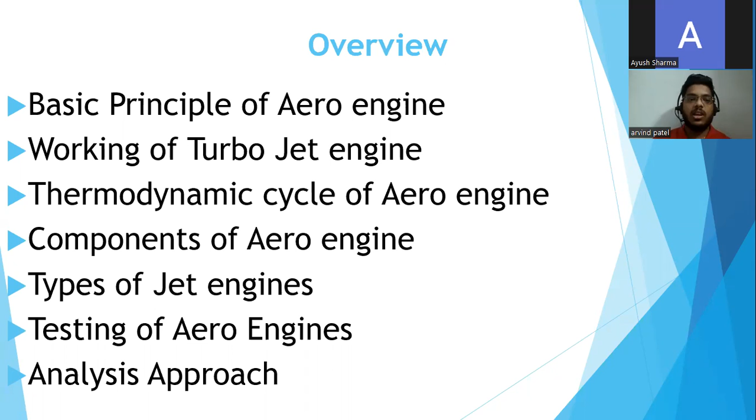Then we'll move toward the types of jet engines in the industry right now, like turbojet engines, turboprop engines, turbofan engines, and what's the difference between high bypass and low bypass jet engines. Then I'll take you through the testing of aero engines, and at last I'll give you a brief overview of how the analysis approaches work in the aero industry. So yeah, let's start.

So let's start with the basic principle of the aero engine. An aero engine basically works on Newton's third law of motion, which states that for every action there is an equal and opposite reaction. So the engine takes a large volume of air, and that air is subjected to compression in the compressor, and then it is subjected to the process of combustion, and then that air is transferred to the turbine blades, and then it will move out of the turbine blades while pushing the engine in the forward direction.

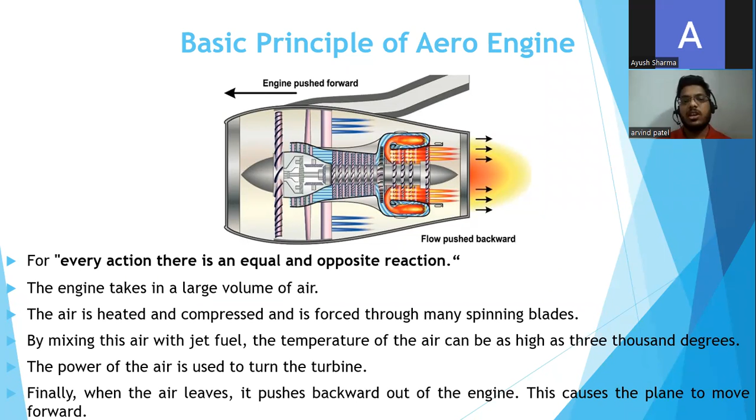So that's how your engine moves in the forward direction. And talking about the working of a turbojet engine, here you can see the different components: fan, compressor, combustor, turbine, and the nozzles, which are placed at the exhaust of the engine.

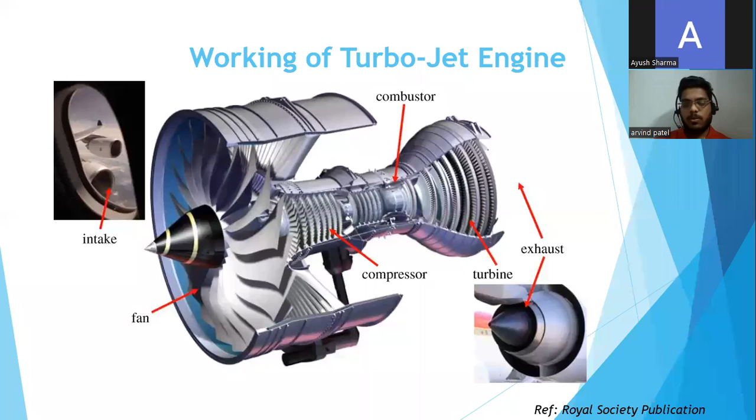So basically we can divide the engine in two sections, a cold section and a hot section. The cold section comprises processes like suction of the air at the intake, and then that air is compressed in the compressor, which increases the pressure of the air.

This high pressure air is then transferred to the combustor, which is in the hot section of the engine. The hot section basically comprises the combustor, turbine and exhaust, in which we have the process of combustion, expansion, and exhaust.

In the combustor, the high pressure air is mixed with the fuel and it's ignited. When the ignition takes place, because of the combustion, the internal energy of the air increases, which increases its velocity.

That high velocity air is then transferred to the turbine, and from the turbine it is transferred to the atmosphere through the exhaust, which applies a force on the engine in the forward direction, and that's why your engine moves forward. So that's just a brief working of a turbojet engine.

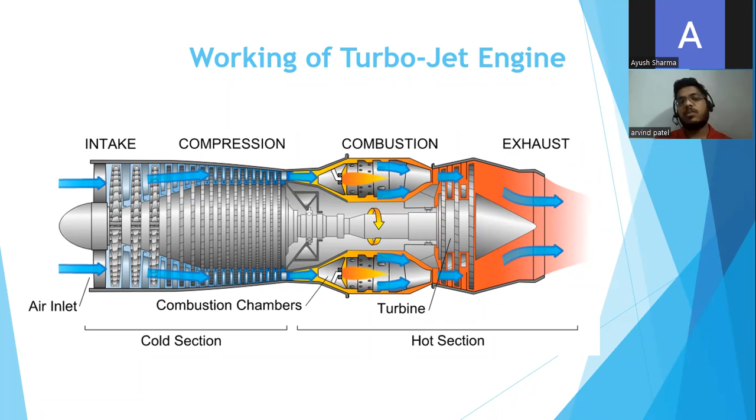Talking about the thermodynamic cycle, an aero engine basically works on the thermodynamic cycle known as the Brayton cycle. The Brayton cycle comprises 4 different processes: isentropic compression, constant pressure heat addition, isentropic expansion, and constant pressure heat rejection.

If you consider the air at point A, point A represents the atmospheric pressure here. Air is compressed in the compressor, which is an isentropic compression process. But in practice, no isentropic compression takes place because of the losses that we encounter in the compressor. So A to B represents the compression process.

Then from B to C, in the combustor, we mix the air with the fuel and ignite it. The process of combustion takes place at almost constant pressure, which is represented by B to C. And from C to D, that high velocity, high temperature air is transferred to the turbine blades, where expansion of air takes place.

This high velocity air then comes out of the engine through the exhaust, releasing the heat to the atmosphere, which is represented by the constant pressure heat rejection process. So that's basically the thermodynamic cycle of an aero engine, known as the Brayton cycle.

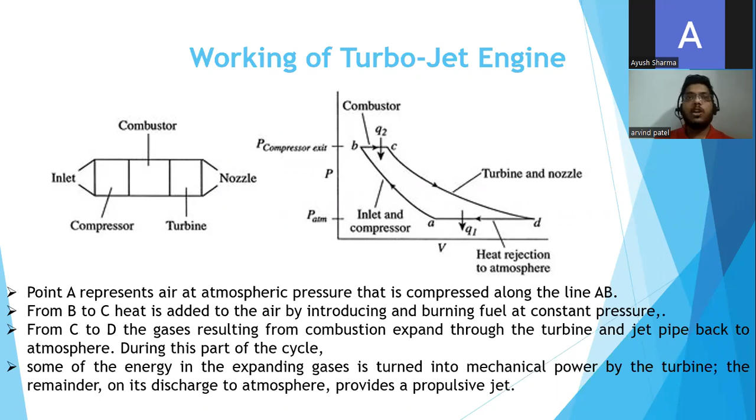Moving forward, there are certain parameters like pressure, velocity, and temperature. So what happens to those parameters when air enters the engine and moves out of the engine? When air enters the engine, during the compression process, the pressure of the air increases.

That high pressure air is then transferred to the combustor, where the combustion process increases its internal energy, which directly affects the velocity of the air, and this high velocity air is then transferred to the turbine for expansion. So how does this conversion of pressure, velocity, and temperature take place? It takes place due to the effect of the shape of the engine.

When air passes through the divergent cross section, it converts its kinetic energy into pressure energy. So you have kinetic energy at the inlet, and when it moves through the divergent cross section in the compressor, you have high pressure energy.

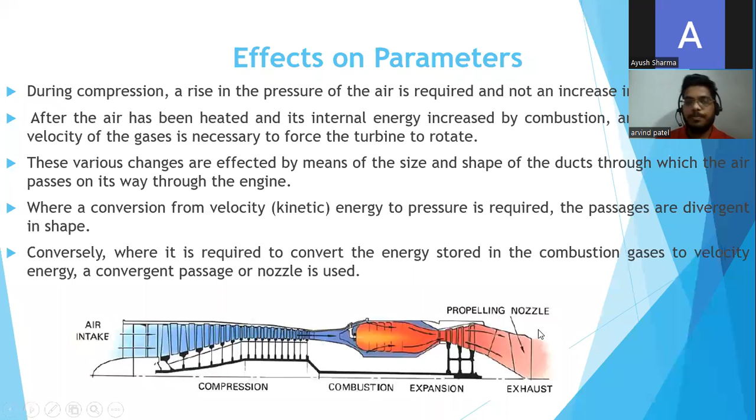Talking about the components of the aero engine, the first component is the fan. It's made up of titanium blades, and the fan sucks a huge amount of air into the engine. That air is divided into two components. Half of the air goes into the core of the engine, through the compressor, combustor, and turbine, and the rest goes through the bypass, which is a passage between the core of the engine and your nacelle. That passage is known as bypass flow.

Bypass flow is just providing high velocity air by passing through that fan. Because of the compression, the velocity also increases, and this high velocity air passes directly through that passage called the bypass. So the engine gets thrust through the bypass as well as from the air coming out of the core. That's the basic function of the fan, provided at the start of the engine. Not all engines have a fan, so we have different types of jet engines based on that, which I'll discuss in later slides.

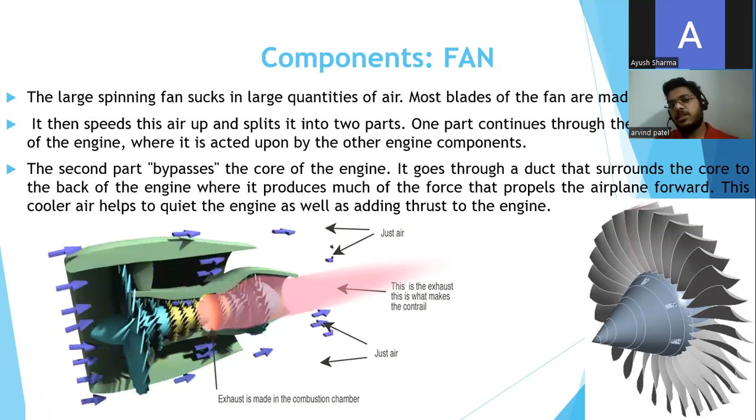Moving to the compressor. As you can see, the compressor has a number of stages. These rows of blades represent the different stages. We have 8 stages, and it's an axial compressor. By axial compressor I mean the direction of flow of your fluid is parallel to the axis of the compressor. In aero engines, right now we use axial compressors.

We have aero engines that use centrifugal compressors as well, but in centrifugal compressors the direction of flow of air is perpendicular to the axis of the compressor. It has some disadvantages. That's why we use axial compressors, because we can add as many stages as we want and get the pressure ratio we want. So in aero engines, most commonly we use axial compressors.

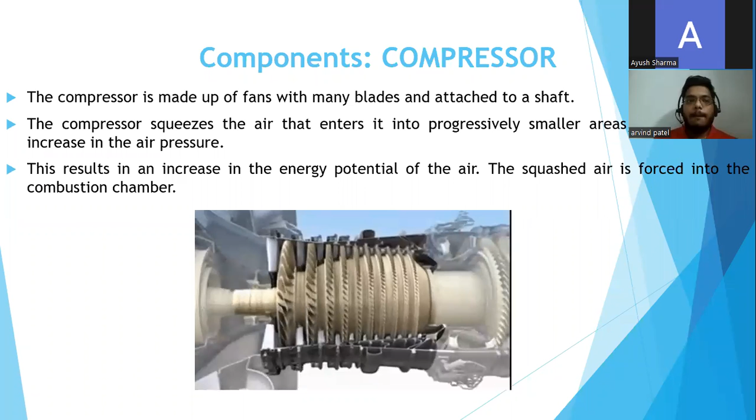The main function of the compressor is to increase the pressure of the air as it passes through the different stages. After the exit of the compressor, the air is passed to the combustor. Here it's shown as one of the nozzles of the combustor. We have 20 different nozzles which spray fuel into the high pressure compressed air, and we ignite that mixture of air and fuel.

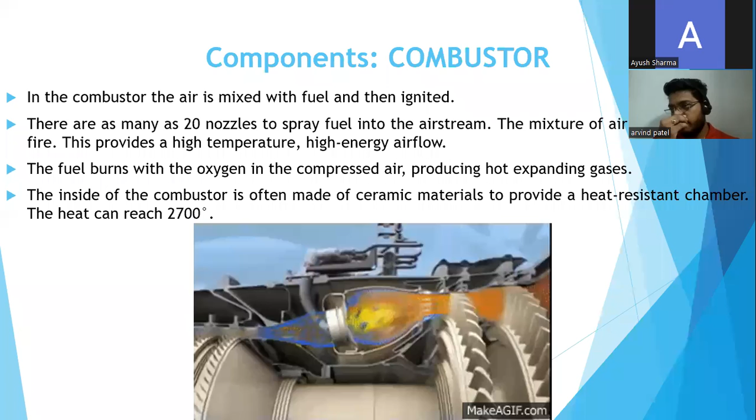Due to the ignition, there is an increase in internal energy of the air. It will also increase the temperature as well as the velocity of that air. So that high pressure, high velocity, high temperature air moves from the combustor to the turbine. Just for your information, the temperature reaches up to around 2700 degrees centigrade at the entry of the turbine. So we need the turbines to be made of titanium alloys, which can withstand high temperatures and don't melt.

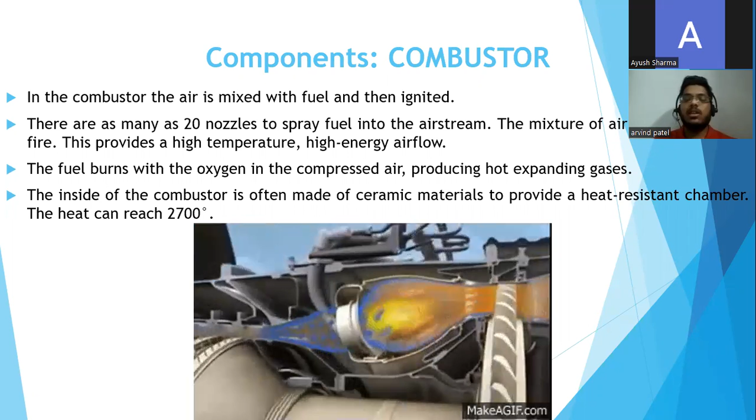And that's what makes your aero engines very costly, because the cost of a single blade is very high. So moving to the turbine. As I mentioned, the product of combustion, that is the air and fuel, after getting ignited in the combustor chamber, moves with high velocity and with high temperatures to the turbine.

So basically we'll have three different stages of turbine, which can be mentioned as high pressure turbine, intermediate pressure turbine, and then low pressure turbine. So through three different stages your high velocity air will pass, and the energy that is produced from the turbine is used to run the compressor and fan as well.

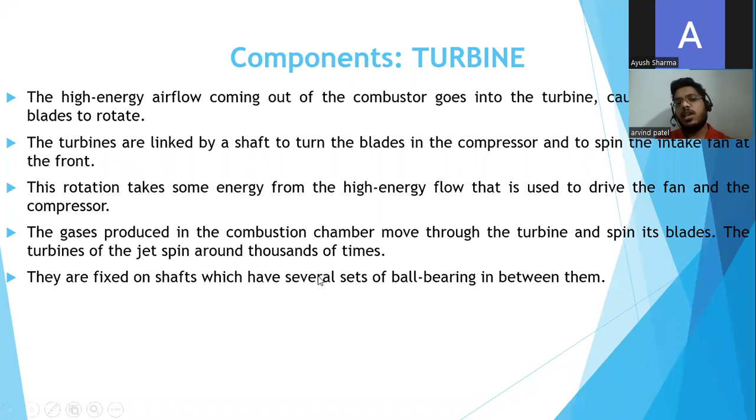And at the exit of the turbine, the air enters the nozzle, which is placed at the exhaust of the engine. So basically what the nozzle does is it mixes the low temperature air which is coming from the bypass and the high temperature air which is coming from the core of the engine, and it will help in increasing the velocity of the air as well, so that we'll get more thrust. As I mentioned, thrust is basically a product of mass flow rate and difference in velocities. So the nozzle plays the part of increasing the velocity as well.

And it has a mixer at the end. I'll show you at the end. It has a mixer placed at the end which mixes your bypass air and the air which is coming from the core of the engine.

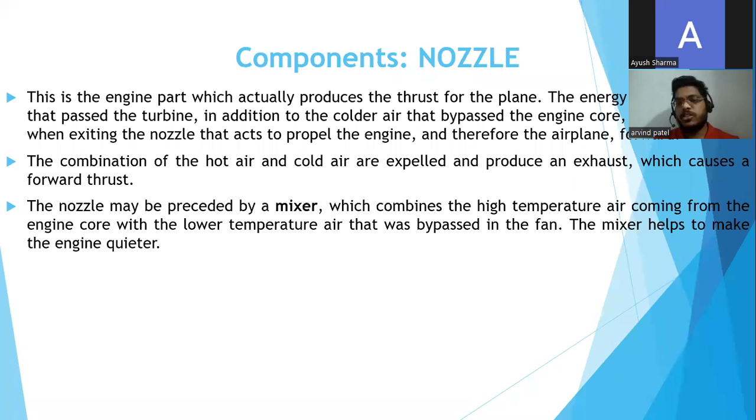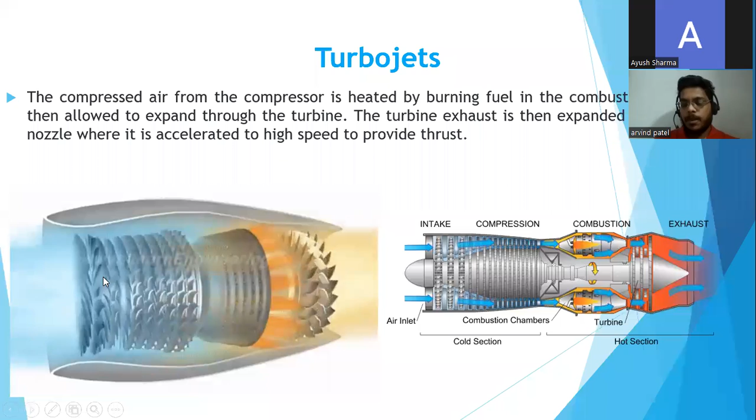So basically turbojet engines suck all the air, compress it, then transfer the air to the combustor, and at last through the turbine it leaves the engine through the nozzle. So in turbojet engines we don't have a fan. Then after some time, we got a new design where we installed a fan at the front of the compressor, and that type of engine is known as turbofan engines.

So the advantage of turbofan engines is that they provide you two different types of thrust. We'll have a bypass thrust because of the bypass air flowing in the passage between the core of the engine and the cover. That cover is known as nacelle. So the passage between the nacelle and the core of the engine is known as bypass. The air that is coming through that bypass has a much higher velocity.

So this high velocity air is going to move out of the engine through the exhaust, so it's going to add to your thrust. That thrust is called bypass thrust or fan thrust. And the rest of the air that is not going through the bypass is going through the core of the engine, where it will be subjected to compression, combustion, and then expansion in the turbine, and it will leave the engine, adding thrust to the engine.

So in turbofan, what is the advantage? When we want a fuel efficient engine, because for the same amount of fuel, a turbofan engine will produce more power as compared to turbojet engines. Or you can also say that for the same amount of power, your turbojet engine will consume more fuel as compared to turbofan engines, because the turbofan is also producing thrust through the bypass. So these are basically two types of engine, turbojet and turbofan.

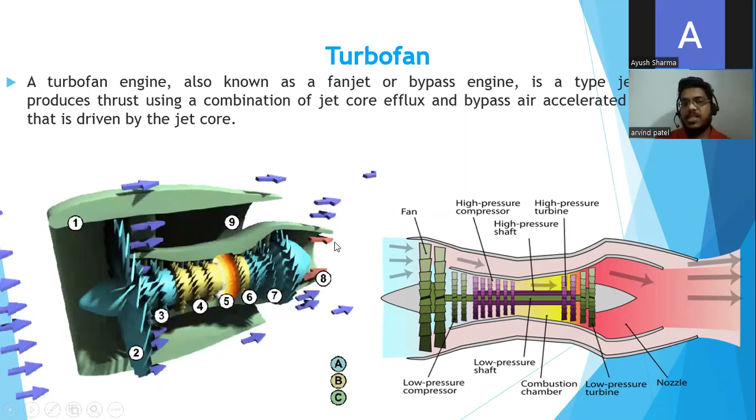Then there comes turboprop. Turboprop is basically similar to your turbojet engine, which comprises your compressor, turbine, and exhaust. But the turbine is connected to a gearbox. So it's connected to a separate shaft through a gearbox, and that gearbox is connected to a propeller.

So the propeller is nothing, it's just doing the function of a fan only. It's going to increase the flow of air passing through your engine, so it's also going to add thrust to it. So that type of engine is called a turboprop engine.

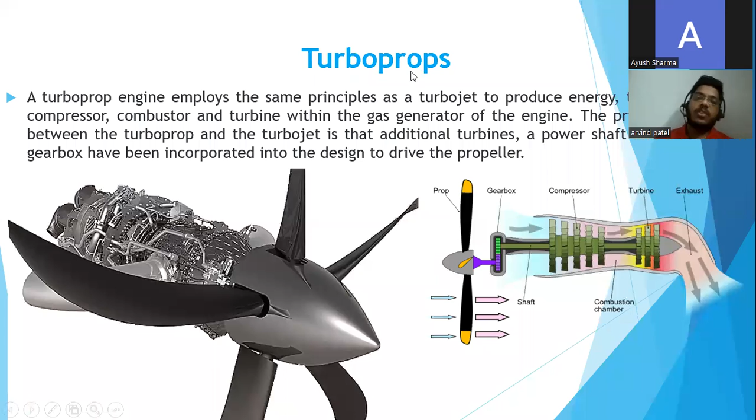And based on turboprop engines, we have turboshaft engines. A turboshaft engine is similar to a turboprop engine. The basic difference is that instead of having a propeller, the turbine shaft is connected to a gearbox, which is separately connected to a rotor, which is your helicopter rotor. So in helicopters we have turboshaft engines, but the working principle is the same: compression, combustion, and then expansion in your turbine.

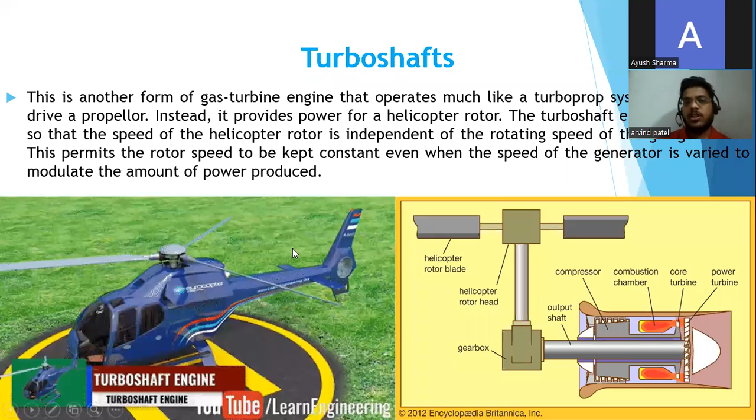Moving to another type of engine, ramjet engines. Ramjet engines are basically engines which do not have any moving parts. Basically, they have a variable area, and because of the shape of the engine, we have a convergent section at the start and a divergent section after the combustor.

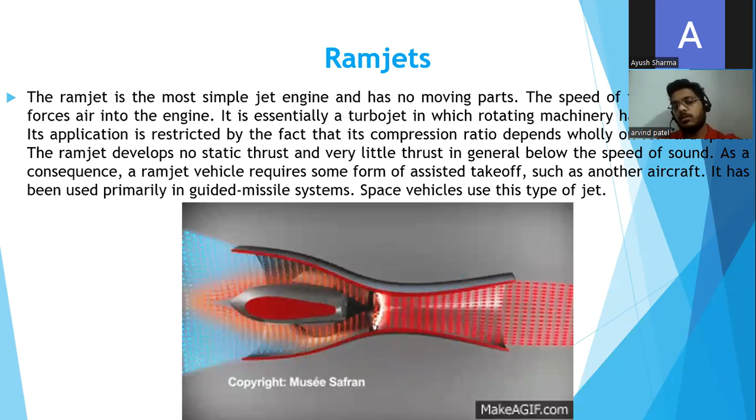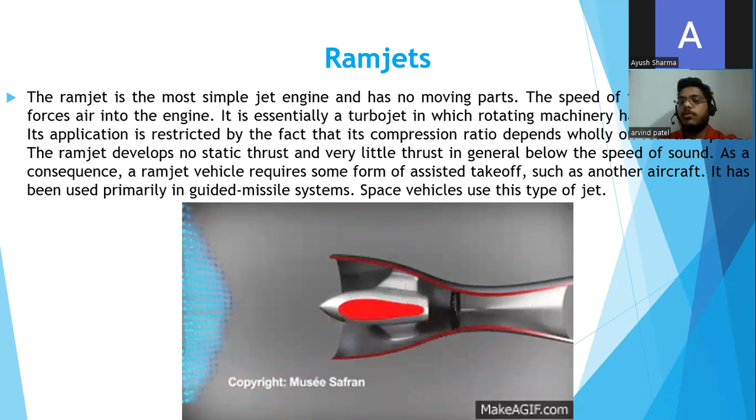So what happens here: when air comes into that convergent section, the speed of that air is greater than the speed of sound, that is, the Mach number is greater than 1. So the convergent section is going to convert the kinetic energy into pressure energy, and that high pressure air then passes through your combustion chamber. That small ring indicates your combustion chamber or combustor. After the combustor, the divergent section will act as a divergent nozzle, which is going to increase the velocity of air coming out of your nozzle.

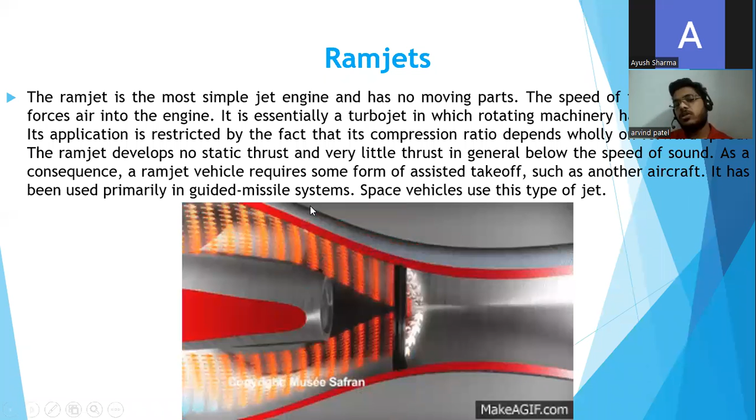So that type of engine is called a ramjet engine. The thrust produced by this type of engine is very less, so we use this type of engine in guided missiles. Okay, so guided missiles basically have ramjet engines.

Now coming to the bypass flow, I would like to add more to this. As I mentioned, the fan sucks the air, and that air gets divided into two different portions. The air which goes through the duct between the core of the engine and the nacelle, that flow is known as bypass flow. So based on that, we have two different types of engines. The ratio of the mass of air going through the bypass duct divided by the mass of air going through the core section is known as bypass ratio. So engines can be divided into high bypass engines and low bypass engines.

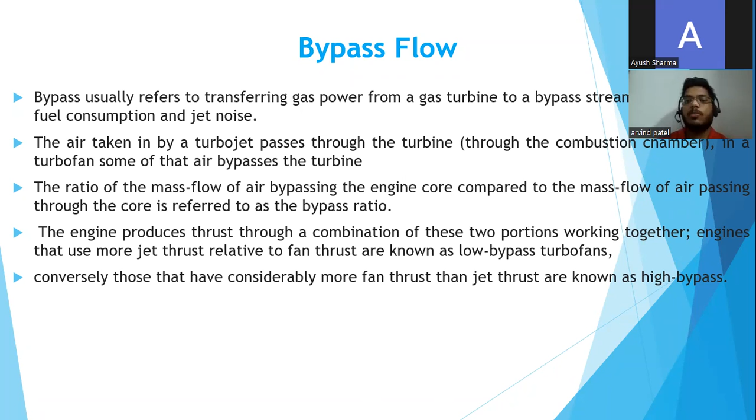So as I mentioned, a high bypass engine is going to have thrust because of that fan air as well. So a high bypass engine is going to have more fan thrust as compared to jet thrust. By jet thrust, I mean the thrust that is produced by the core of the engine. Okay, so we have two different types of thrust: core jet thrust, which is produced by the core of the engine, and bypass thrust, which is known as fan thrust. So high bypass engines will have more fan thrust compared to low bypass engines, which have more jet thrust.

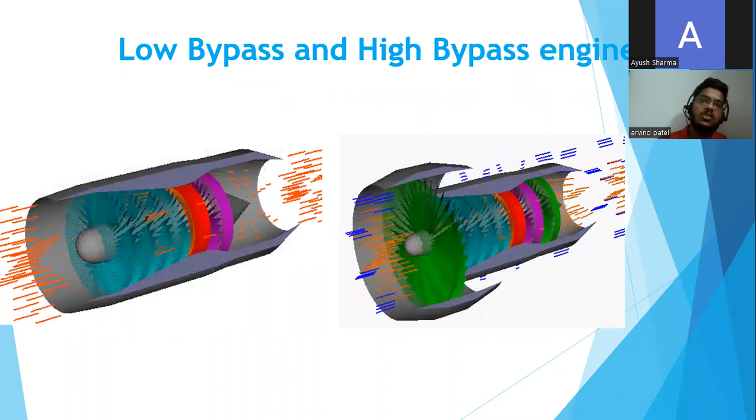So as you can see here, the left hand side shows the low bypass engine and the right hand side shows the high bypass engine. Low bypass engines are basically installed in military aircraft because there we are more focused on thrust, and there are space restrictions as well, so we cannot use a high bypass engine there. And we are not worried about the amount of fuel used in military aircraft, whereas in commercial aircraft we are more worried about fuel efficient engines. So we install high bypass engines in commercial aircraft.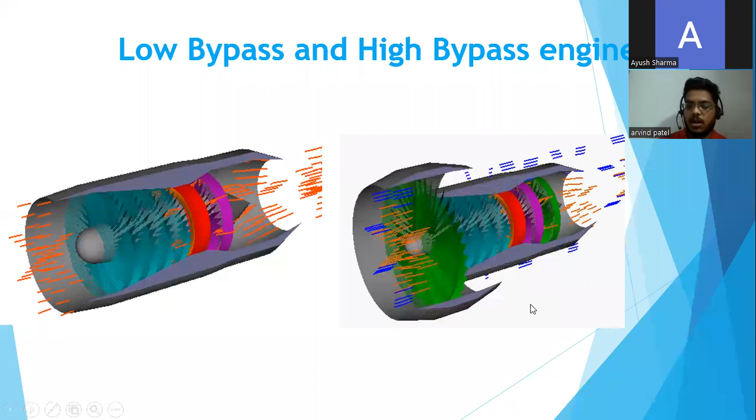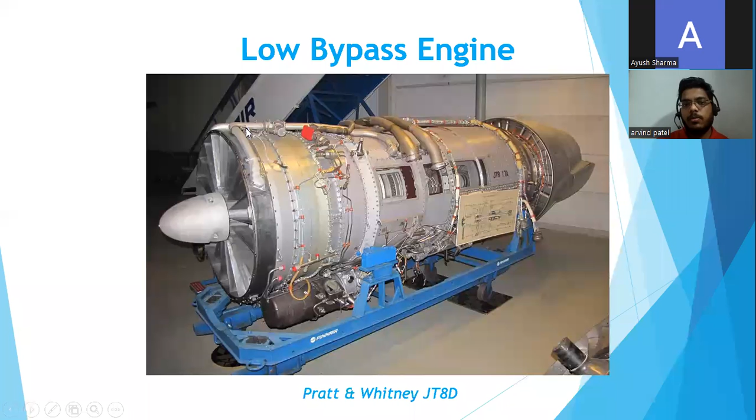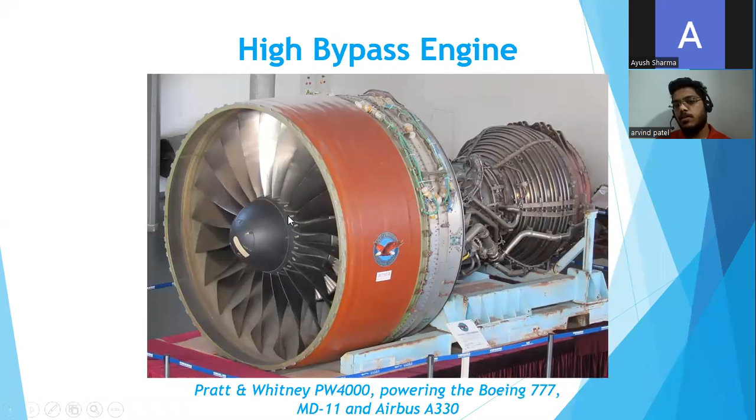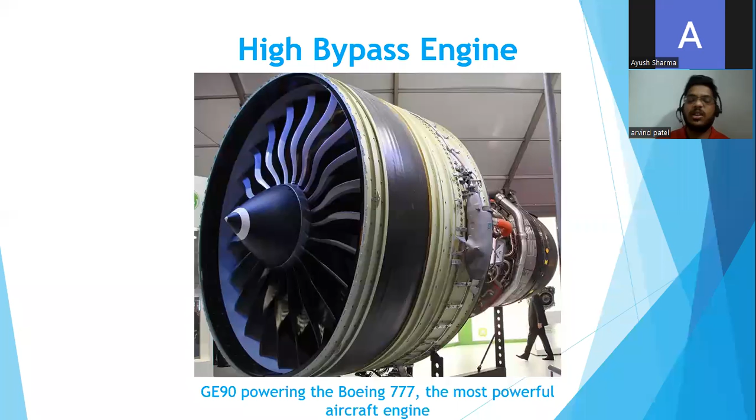It powers your Boeing 777, and I think that's the most powerful aircraft engine right now. So at last, I would like to add about the afterburner. So the afterburner is nothing, it's just a combustor which is placed at the end of your turbine, so that the air which is coming after the turbine is mixed with the fuel again, and we have one more combustion there.

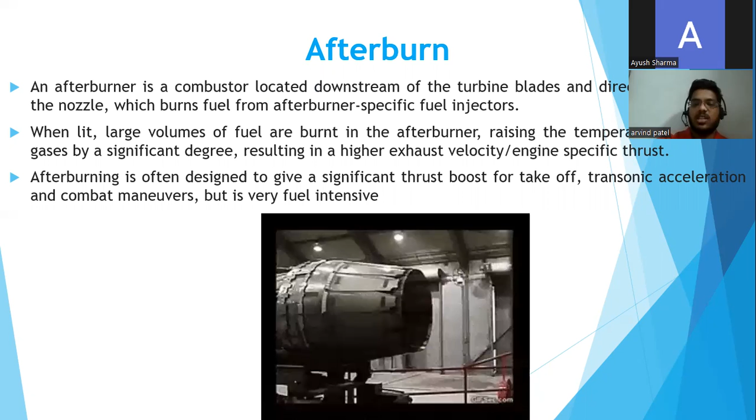So why are we adding combustion after the expansion through the turbine? Because we want to add more velocity to the flow. Okay, so with more velocity, we're going to increase the thrust as well. So we have the afterburner. The afterburner is basically just a combustor which is located at the rear of a turbine.

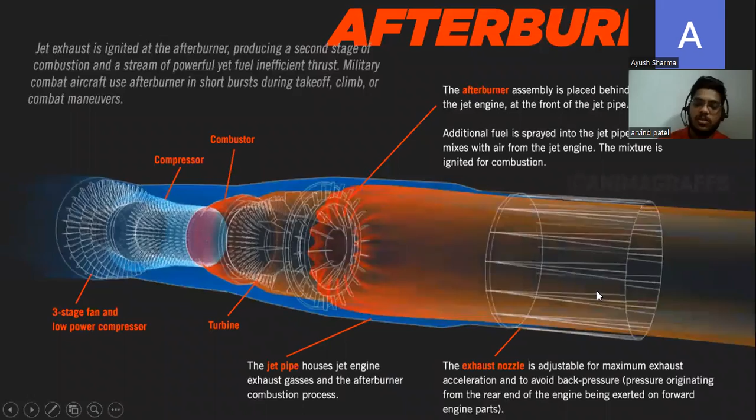As you can see here, we have the combustor, then we have the turbine. So after the turbine, we have a unit which is called the afterburner. The afterburner is adding fuel at the end and igniting it, so that we have a higher velocity fluid coming out as exhaust, which is going to increase the thrust of the engine. We basically have these on fighter jet planes, as you can see.

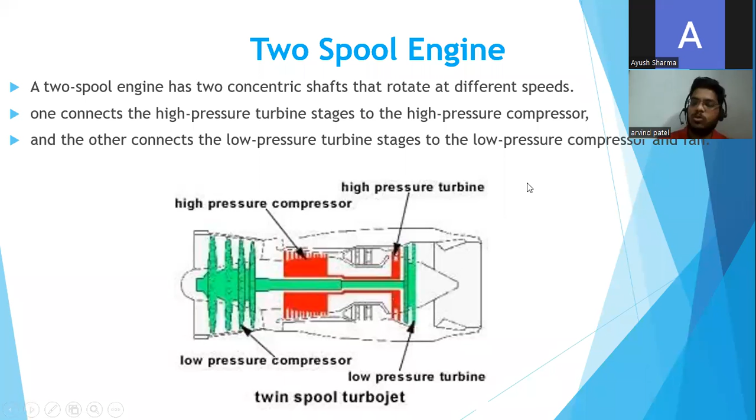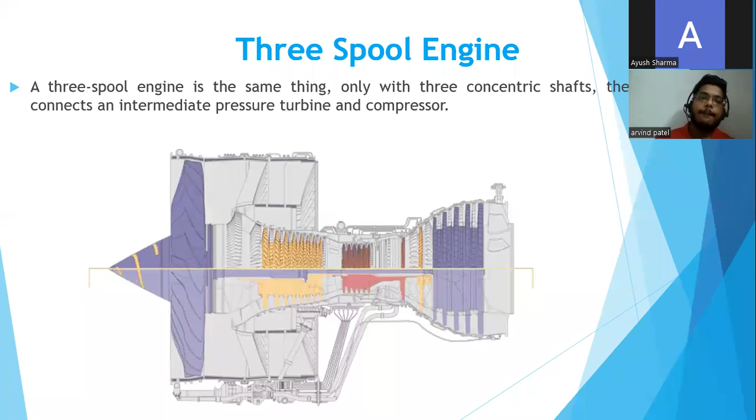And coming to the testing of the engines. Basically a company spends a lot of money testing engines. A company tests its engine at ground level conditions, high altitude conditions, and also for environmental conditions, like if your engine is subjected to hailstorm or rain, or situations where a group of birds strikes the engine. That's called bird strike testing.

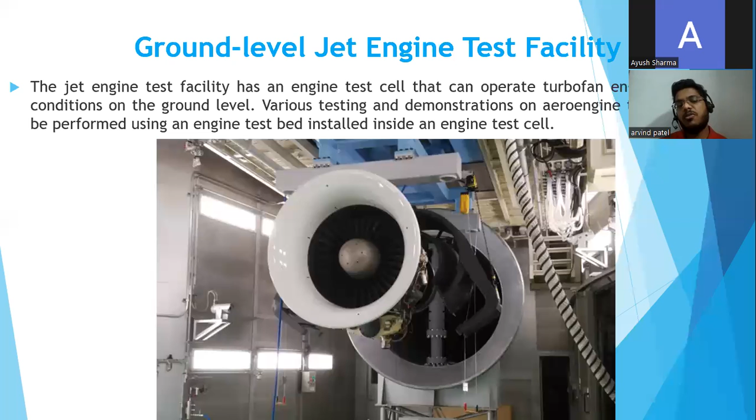And there is a type of testing in which a blade of your turbine or compressor rotor comes out, to make sure it won't affect the airplane and only damages your engine. That type of testing is carried out by the company. The first one is ground level testing. In ground level testing, we have a test bed, and on that test bed we run the engine at its full capacity to evaluate the pressures and temperatures to which all the different components are subjected. That is called the ground level engine test facility.

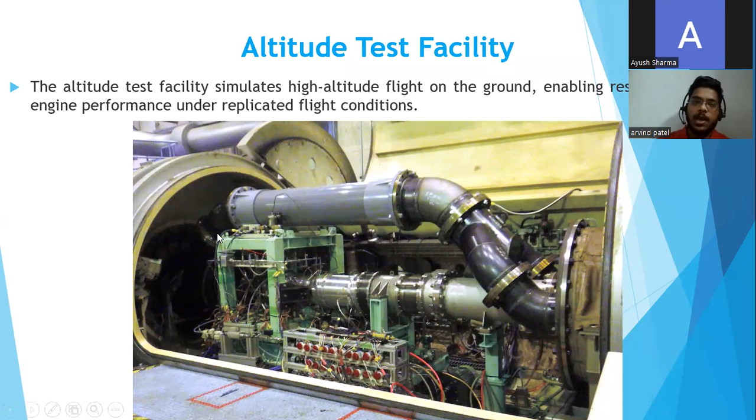Then we have the altitude test facility, in which we create the effect of a high altitude environment, because as you keep moving upward, the pressure and temperature change. Based on that pressure and temperature, we create that environmental condition, run the engine and estimate how the engine behaves at high altitude conditions. So that test is called the altitude test facility. And this is one of the most important tests, because the Federal Aviation Administration, the FAA, provides the safety certificate to jet engines.

So they ask to have that type of test, which is called blade off testing, or in Rolls-Royce we call it fan blade off test, FBO. So what we do in this type of testing, we just loosen one of the blades of your fan, compressor or turbine, and we start the engine to its full capacity. So as the blade gets loosened at the root, where it is connected, it gets removed and it damages the engine, and it's very severe.

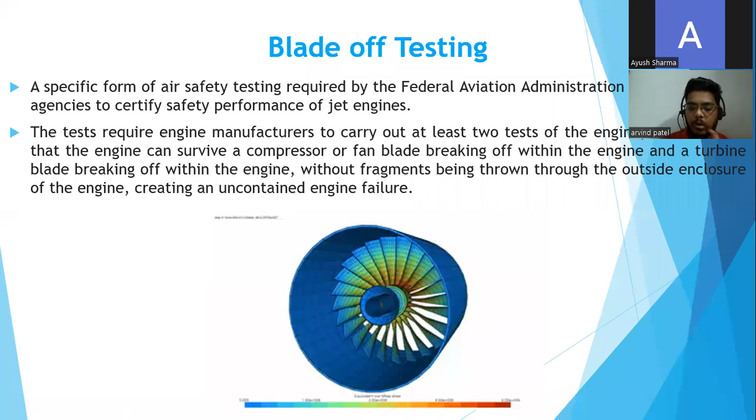I just wanted to show you a video of that. I just want to show you this. So this is what they are doing.

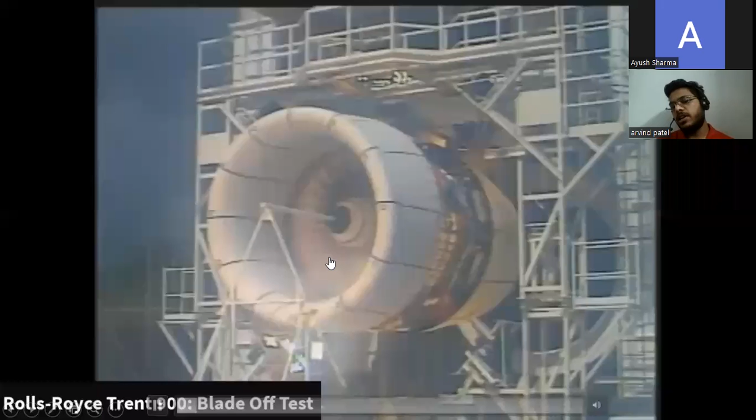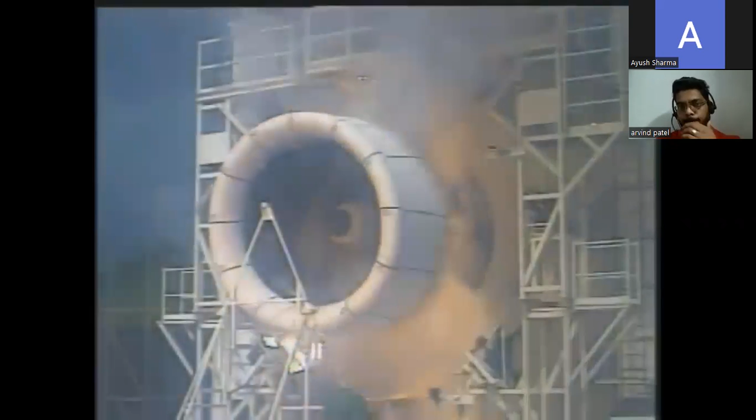Yeah, this blade. They are testing this blade. So this blade is loosened at its base.

This is your bird ingestion testing. So they will just pass the bird through that engine and check whether it's working fine.

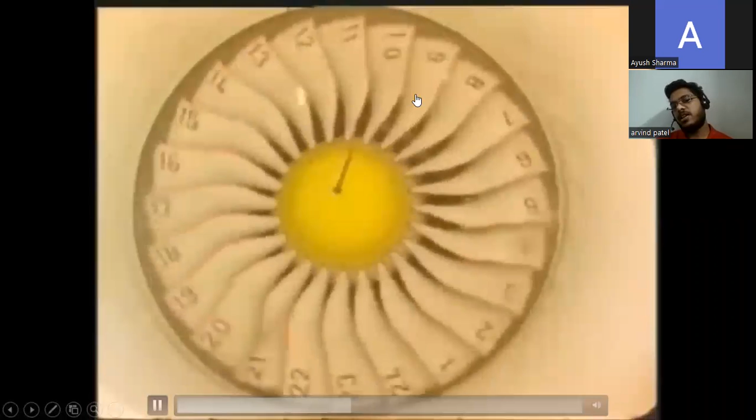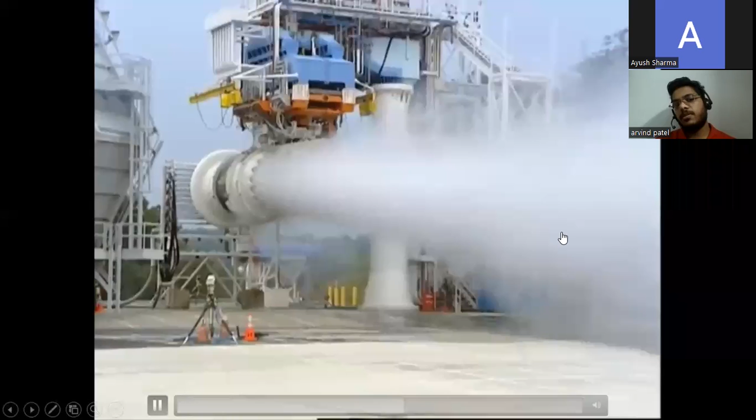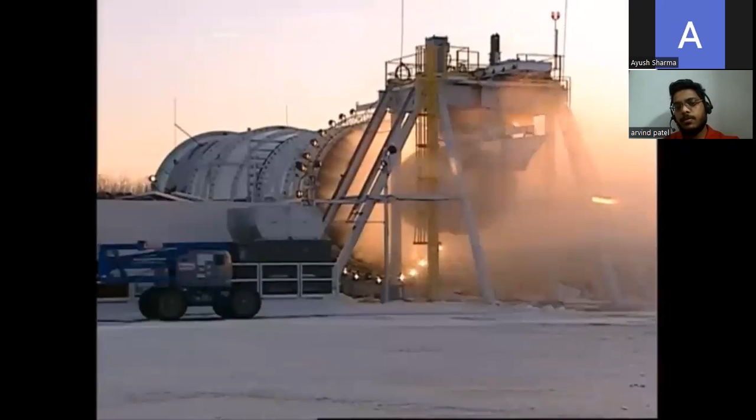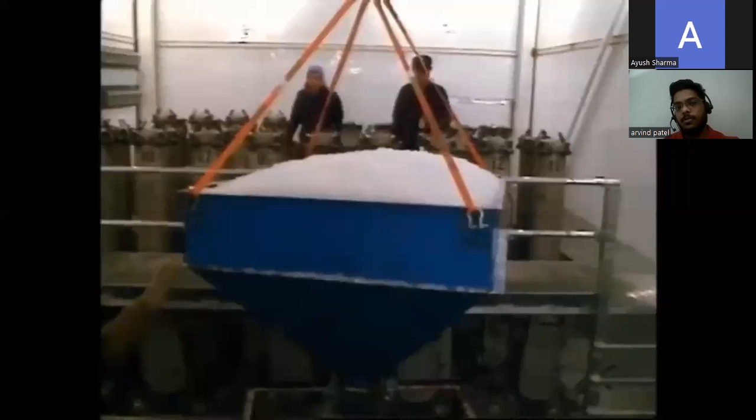Then they have the water ingestion testing, in which they will subject the engine to environmental conditions like hailstorm, or the cold testing, when they test the engine at the coldest conditions. This is your water ingestion testing. Yeah, they test the engine in the coldest condition.

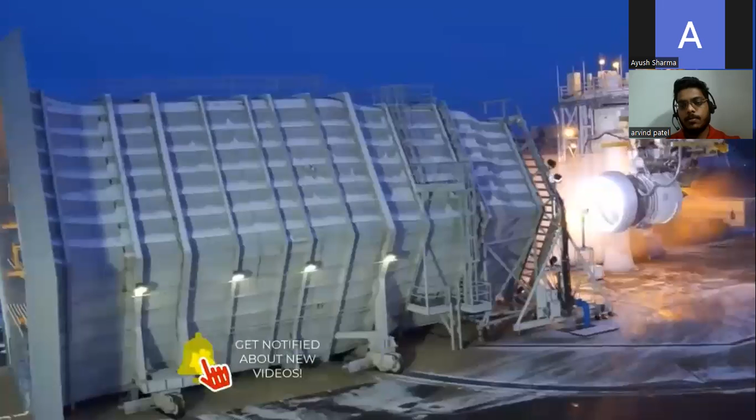And at last I'll take you through the analysis approach that we use in our industries. So basically, your entire engine is first tested for the fluid flow analysis, in which they have their own in-house software. Those software are able to use the equations of fluid flow and heat transfer. So by using those equations and solvers, they can evaluate the pressures and temperatures as well as the flow rate of the air going through the engines. So that is called the fluid flow analysis of the engine.

And based on the output of that fluid flow analysis, they will use the pressures, temperatures, and flow rates for the thermomechanical analysis. So thermomechanical analysis is basically a 2D analysis in which we use the output from the fluid flow to obtain the metal temperatures, like the temperatures of the blade, hub, as well as the different components in the engines. So metal temperatures are obtained from the thermomechanical analysis.

And after obtaining the metal temperatures, we use these temperatures to evaluate the stresses that are induced in different components of the engines, and that's what we call structural analysis. As you know, temperature affects your stresses as well. If you are aware of thermal stresses, thermal stresses induce axial as well as radial stresses in the different components of the engines. So we do that in structural analysis. So this is the basic analysis approach right now available in the industry.

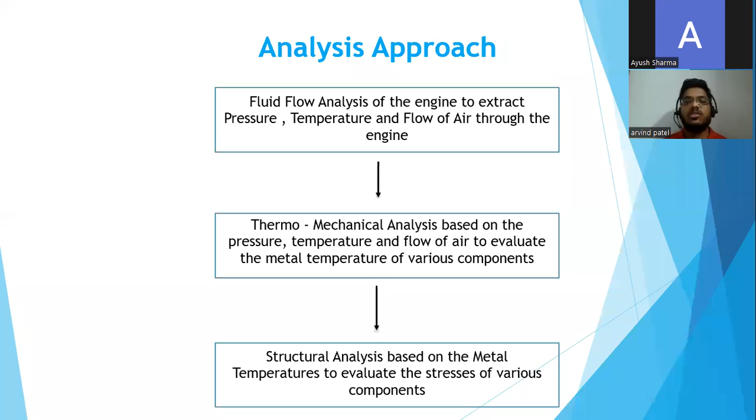And we also do the CFD analysis of the turbine blades, compressor blades, and different components of the engines to evaluate the CDs, the coefficient of discharge, and we also use CFD analysis to evaluate the coefficient of pressure, which we use in different analyses of the engines. So yeah, I think that's all from my side.